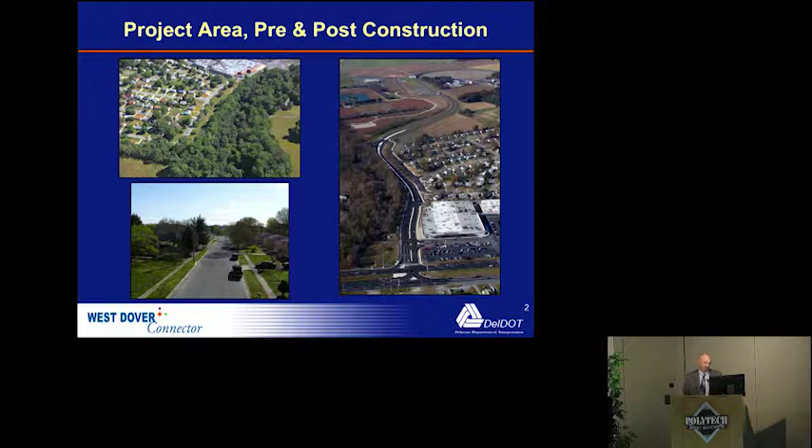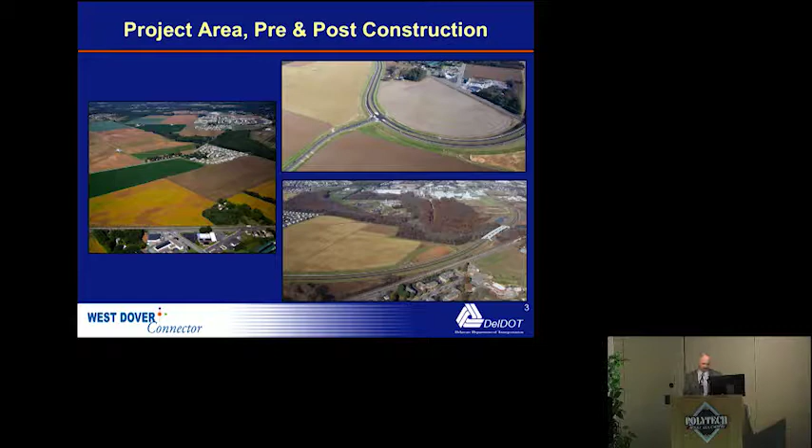Then you can see it traversing to the north across the Kesselring Farm. There's the new Boy Scouts facility as well as the new Kent County Park facility there. This is as the project traverses the Kesselring Farm on the opposite side of the railroad tracks and then proceeds over the Puncheon Run.

This is the bridge that spanned the wetland area. This was all part of our Army Corps negotiations. Rather than impacting the wetlands, we chose to span it.

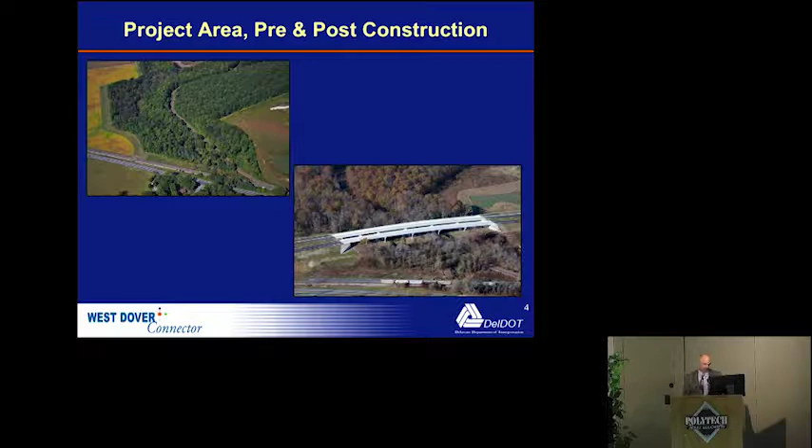And this is the northern terminus in the vicinity of Eden Hill. The first 1,000 feet of this was actually built by the developer, and then we tied into it.

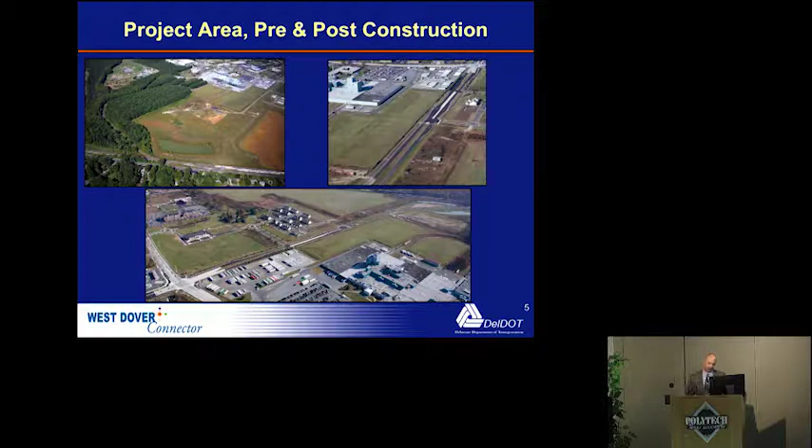In the early stages, we met with the resource agencies multiple times. This was the way we kicked off the project. We loaded them all up on a bus, took them out, and toured the project area. This was a huge success and very well received.

We then proceeded in putting together a working group. Let me note here that we had over 40 members on this working group. Lesson learned: don't have over 40 members. There is zero chance of getting consensus with that many members.

The bus trip worked so well with the resource agencies that we loaded the working group up and did the same thing. Again, this was very well received and time well spent.

As we went through the process, we brought the working group together 8 different times, and we also had 5 public workshops. All of the working group meetings were open to the public and very well attended. Strangely, we had free dinner at these events. I'm not sure if that brought them out or not, but the last one we did not have dinner, and there were very few people there.

But anyhow, at certain steps in the process, we'd have aerial displays and have the working group members draw up their ideas, and we ended up with 28 different alignments, which were then whittled down to 4 alignments that were taken into the alternatives analysis.

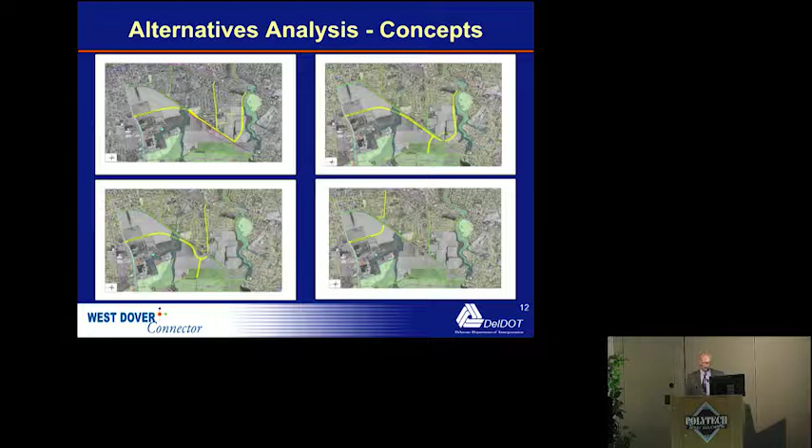These four, as well as the no build, of course. Like I said, we had 5 different public workshops.

Later in the process, we started bringing real estate to these meetings. We had 13 total acquisitions of residences, and as those people arrived at the working group or at the workshops, real estate would take those individuals aside and explain the entire process of how we do a total take, what kind of deals they get, and that was huge, because those were the people that were really impacted. They were also very pleased with the results of our impacts to them, I might add.

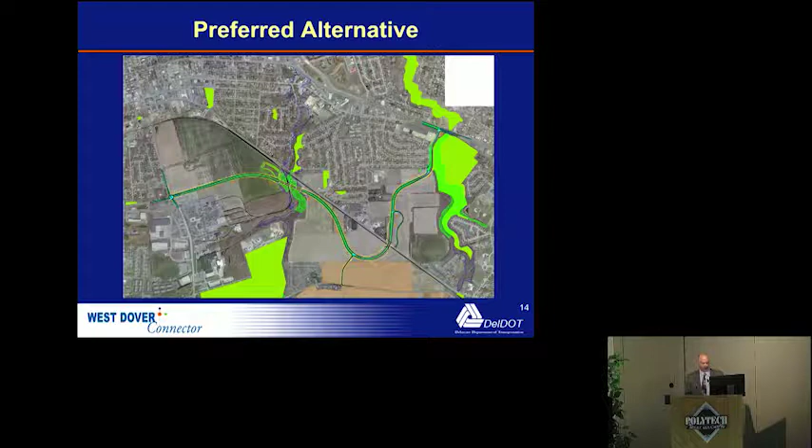This was the preferred alternative that was moved into final design. This alignment changed multiple times working with the impacted property owners. What was initially the preferred alternative looked slightly different than this.

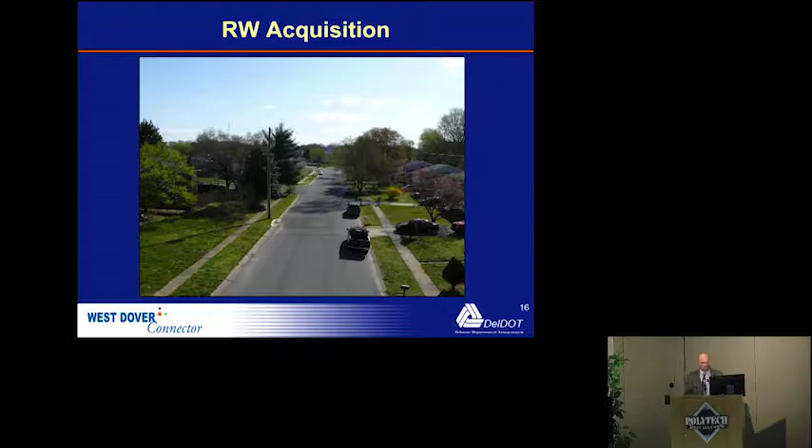All right, some lessons learned. This was Charles Polk before we started tearing down houses. The houses on the right are the ones that we acquired in total. They were all pretty tickled with the deal they got. The people on the opposite side of the road, however, were not so happy, and we're still dealing with them today.

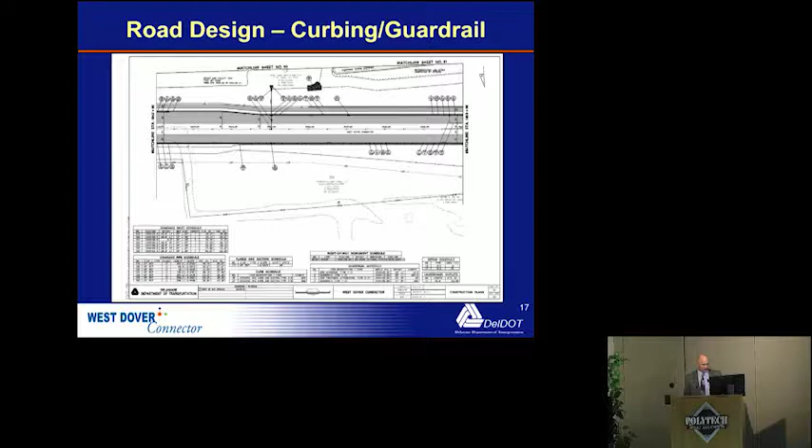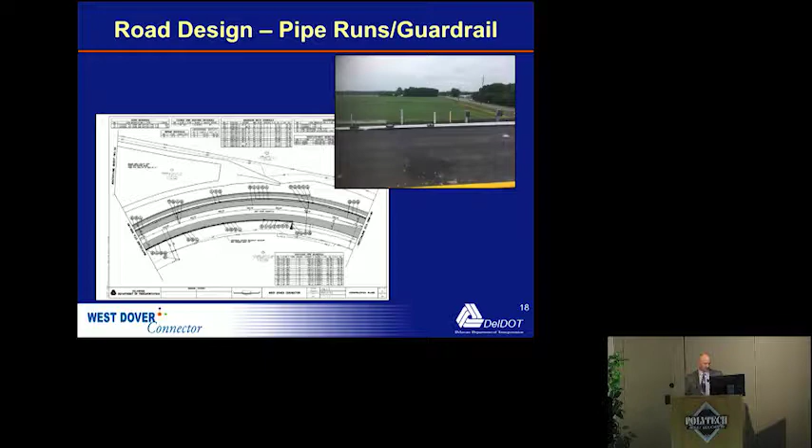Another instance with guardrail here. As you can see, the roadway is going through a pretty sharp curve. It's all closed drainage, and as we know, pipes don't follow curves. We had plenty of room to set these pipes deep because this was a high embankment area. Unfortunately, we did not, so we ended up having conflicts with the guardrail posts hitting the pipes. To fix this, we're actually coming back in, and every 4th post is going to get an additional post with an offset block to get them away from the pipes.

Bridge and roadway MOT. This, I'll just come right out and say, got missed. We had a consultant designer on the roadway. We had in-house designers doing the structures. Nobody looked at MOT for this structure, so I'm sure Mark could probably comment on overruns, but that was missed.

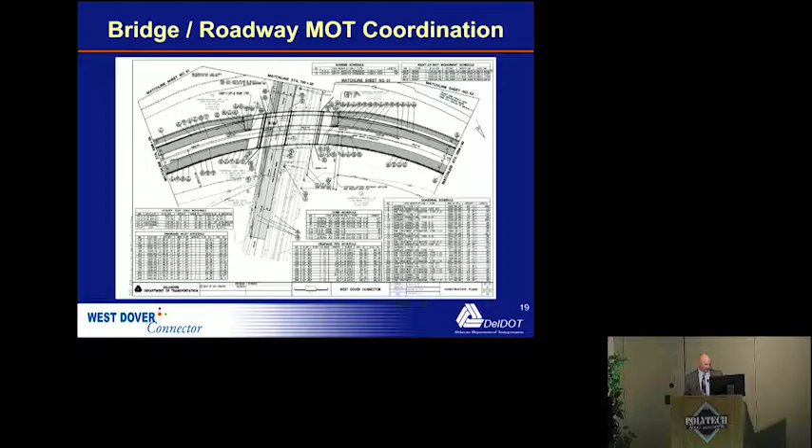Utility conflicts, as we all know, these tend to occur. The picture on the left was an existing signal pole and high voltage electric lines. When we came in to install the new signal pole, there were direct conflicts. So we had to come in, and the city of Dover actually put this line underground. But it's something that we should have caught earlier in the process.

The instance on the right, this wasn't really our fault at all. Delmarva Power came in to install electric back to the Boy Scouts facility, and instead of setting it far enough off the roadway that we wouldn't impact it later, they put it right on the edge, and so this had to be relocated as well.

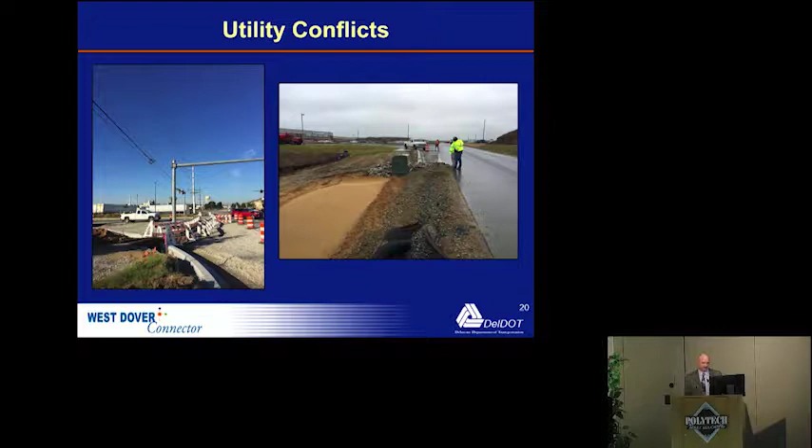Let's see, additional last minute signage. If you look at the sign on the top right, it says Clearview Meadow. This is a development over on Route 8. One of our area legislators drove by that sign and called us up. We were about 2 months from opening the roadway, and said, I want one of those signs out on the POW MIA Parkway. The powers that be told Mark and I to make it happen.

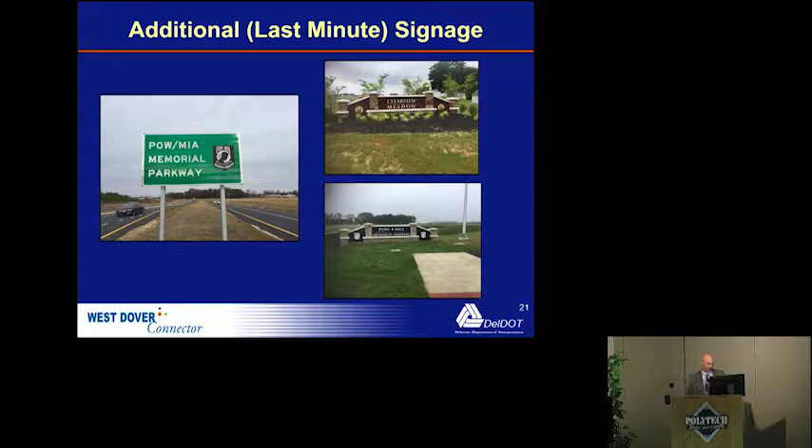Kudos to Mark and to Mumford & Miller for getting this monumental sign up. And the sign on the left was a very similar situation last minute, but working with the sign shop and the contractor, we were able to accomplish both of these. They were very well received.

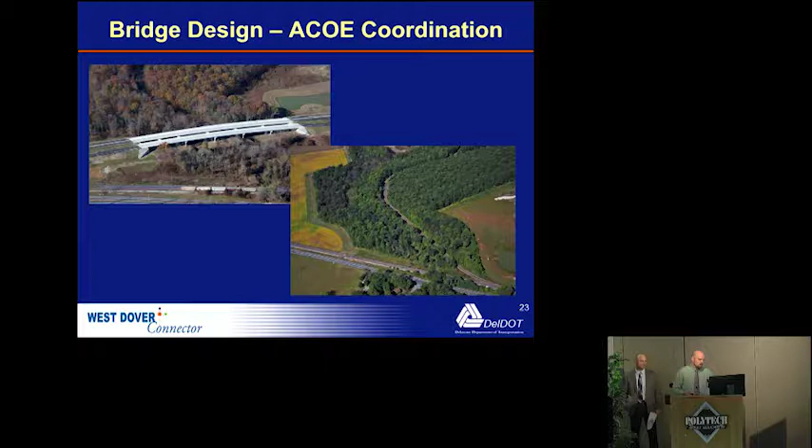That's when I entered the project and took it from there. We had some major issues during construction - lessons learned.

A railroad needs 23 feet of vertical clearance over their tracks. I think this probably came about because of the VE process - we tried to reduce the embankment heights, and in doing so, I think the clearance over the railroad was reduced to almost exactly 23 feet.

When we got into construction, there just wasn't enough tolerance there, and it's kind of a big deal when you build a bridge and you can't build it high enough. So that was a lesson learned - always give yourself enough tolerance in the field, whether it's survey or construction tolerances. You should always give yourself some wiggle room. So the fix was simple, but it shouldn't have happened.

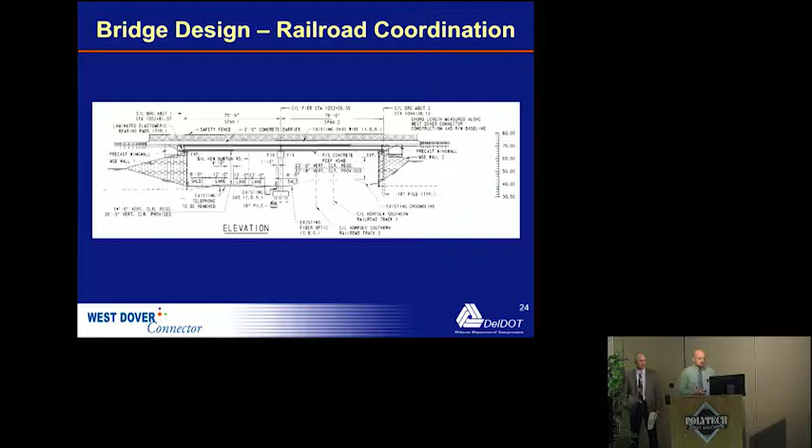We also had some utility conflicts along New Burton Road by the tracks because there were high aerials that restricted the crane from driving the piles. So we had to go back to our design and find a solution.

It ended up being that we could drive all three lines of piles, but one of the pile lines was supposed to be battered. We ended up driving them straight, and we checked the design to make sure that was acceptable.

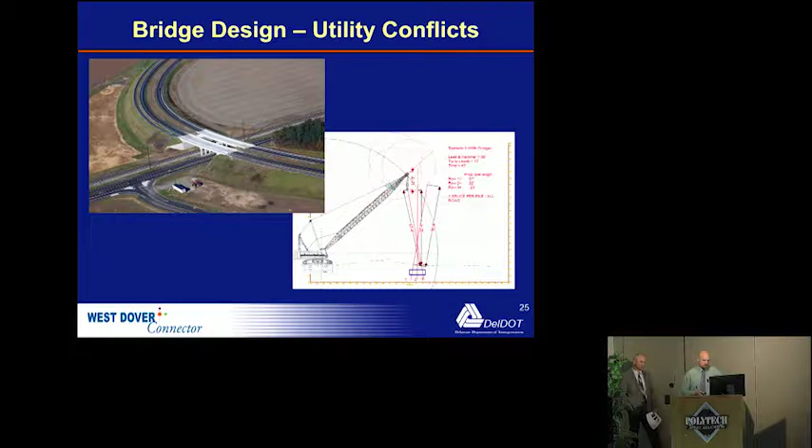In the picture of the crane there, I sent the contractor a cross-section, and he threw his crane in there to show it. The contractor was very good to work with through this - they were always double-checking everything before they did it.

The reason I'm talking about this is with both of these projects, the original designers of these bridges either moved up or are no longer with us. So we always have to work around those issues - there were a lot of lessons learned in how to deal with that on this project.

One of the main things for me was if a problem comes up in construction and the question comes to me and I wasn't the designer, I have no idea what's going on. I would rather have made a mistake myself and know how to fix it - it's easier to come up with a solution.

Also, during this time we were writing our new bridge design manual, and a lot of the details from West Dover were taken for that manual, looked at, and revised based on what we learned. Going forward, we have a lot more standardization in our processes and details that will help with this issue. So, Mark?

I started with the groundbreaking. This is the Secretary's first groundbreaking experience. You see your pink shovel still brand new in this photo.

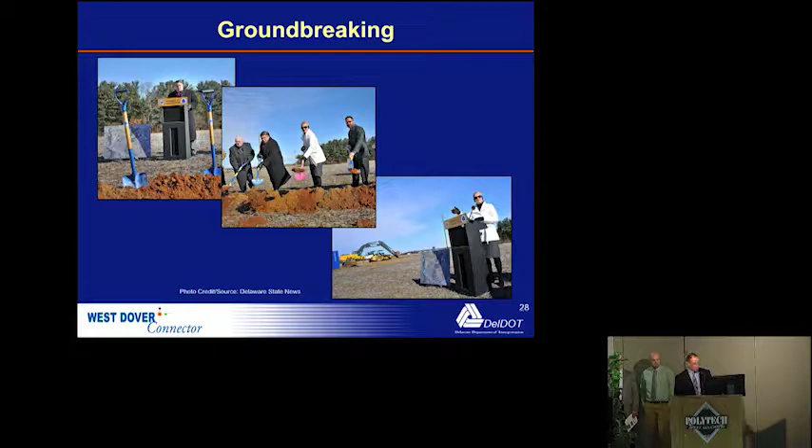This job featured a wetland access road. This is something I've never gone through before. I was a little concerned this could have ended very badly.

We worked with Carol Sullivan and Ken Dunn to come up with a plan that would work. The theory is to construct a wetland access road through the wetlands, and the little fingers coming off to the left here of this plan are where the bridge piers go. There's a proposed temporary wooden stream crossing for Pigeon Run.

The wetland access road would be constructed out of geotextile laid on the existing ground with R4 over top, choked in with number 3 stone. Good theory. I was a little concerned it wouldn't really pan out this well. By putting this road in this way, we wouldn't have any ground disturbance. The equipment can move in and out without disturbing any of the ground.

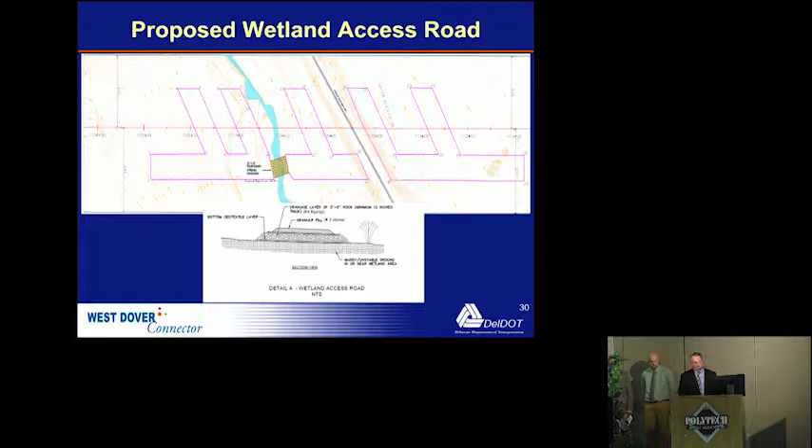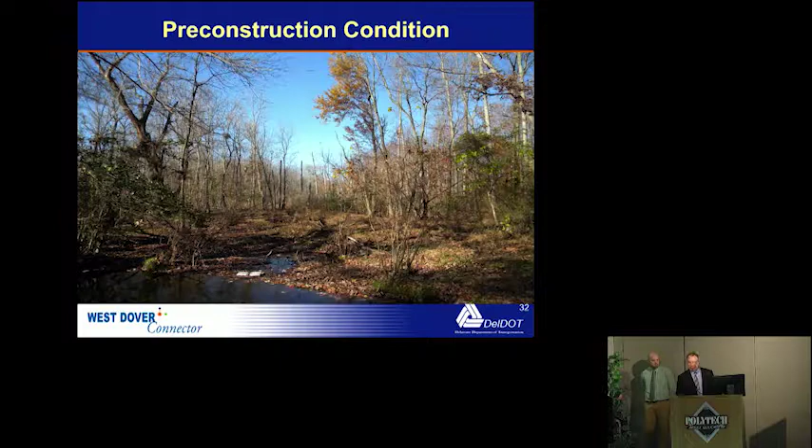Once we got started with clearing and grubbing, the contractor would lay out wooden planks for the equipment to run on, walk out, remove trees, and haul the trees back out. Again, by running on the platforms, you're not disturbing the ground.

Once you're done clearing and grubbing, they were able to go in and start installing silt fence. Now the silt fence, we didn't install it as your normal trench-in method. They would leave the flaps out and then lay compost logs on top—again, not disturbing the ground.

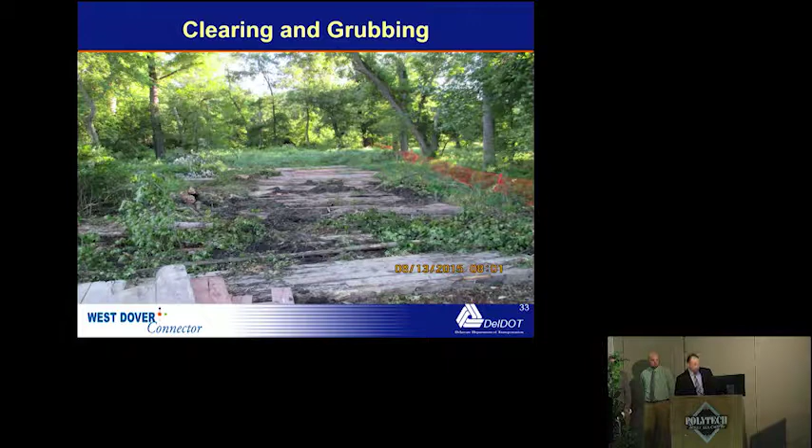Once they had all the silt fence in, the contractor could go to work. This is a shot of what it looked like during construction, with the wetland access road on the left side of your screen, with the little fingers coming off to where all the piers were.

This actually worked very well. We're very pleased with how this went down. There were a few incidents with some rainstorms that maybe toppled over some of the silt fence, but for the most part, this was a huge success for us.

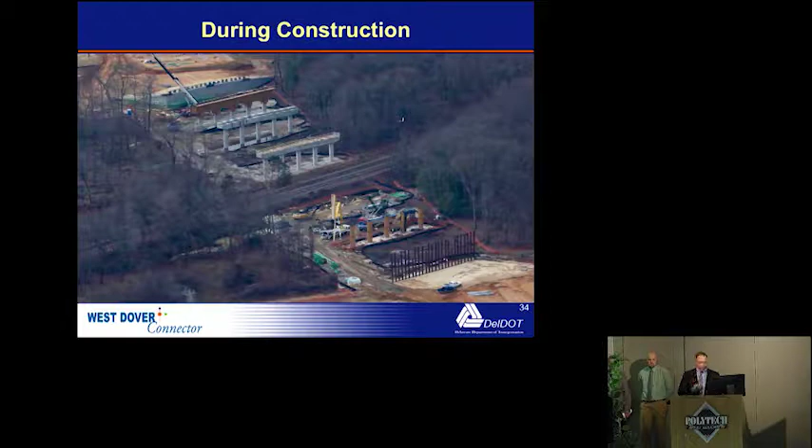One thing I missed on the previous slide—the contractor, before he started, had to as-built the existing wetlands, because when he's done, he had to go in and put all the material back and regrade everything to within a tenth. This grid was gridded out like a 10-foot by 10-foot grid, so they were able to put everything back within a tenth.

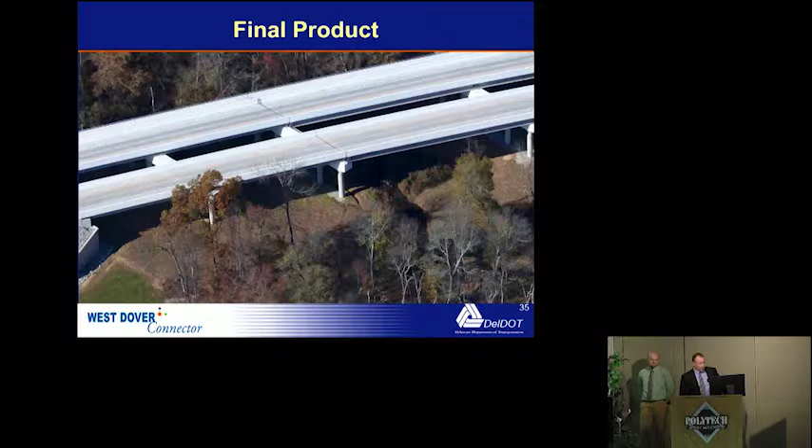Next thing I'm going to talk about is precast beam delivery. Normally this isn't a big deal—it's really a non-event. For some whatever reason, on this project, it was an event.

The precast beams here are about 130 feet long, some of the longest ones. The beams are cast in Pennsylvania. We have a police escort come out of Pennsylvania, come down to Delaware, pick up a police escort in Delaware, and bring it all the way down to the project.

This project, these beams had to cross the Roth Bridge. The Army Corps of Engineers said if that beam comes across our bridge, you have to close it completely, and only that beam can be on the bridge—no traveling public. I'm not sure who designed that one, Craig, but you might want to look at it and maybe beef it up a little bit.

Fortunately, maintenance was able to do some rolling roadblocks to help get the beam across. For every single beam that had to come across, you had to do a rolling roadblock. One of the beams even took a wrong exit coming in from Pennsylvania.

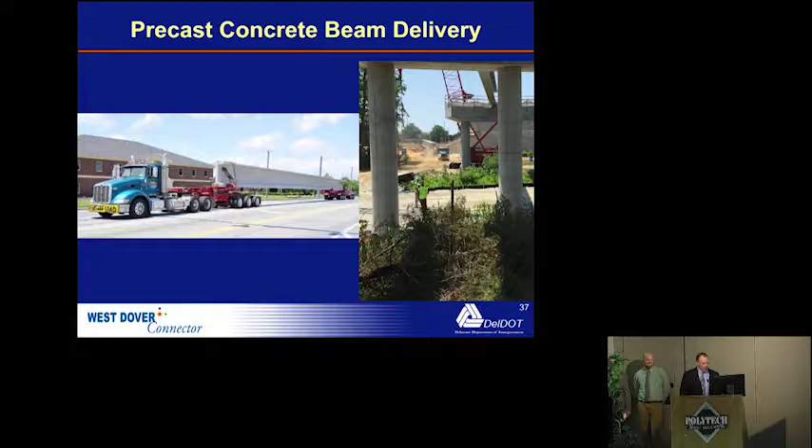Fortunately, the vehicle was able to stop prior to going under the beam, or this would have ended very badly.

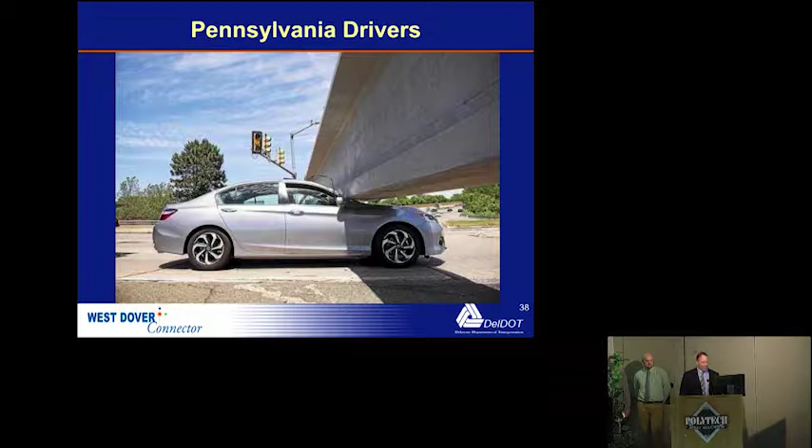Pennsylvania drivers, this isn't Delaware.

The last piece I want to talk about that was a huge success for us was the reconstruction of West North Street. The original design intent for this project was to just patch West North Street and do some crack sealing. When our inspectors went out and did an estimate on all the patches that would have to be done, they came up with around $1 million worth of patching. We were also going to do an ultra-thin overlay, which would have cost $300,000. In all, to just put a Band-Aid on West North Street, it would have cost about $1.3 million.

So we started thinking about what if we just reconstructed the entire thing while we're doing West Dover. Ryan O'Donoghue with FHWA said, sounds like a great idea, do an estimate, let me know what you come up with. Because there's Kraft, Procter & Gamble, and NRG along West North Street, we thought, why don't we just precast panels, this new innovation, the Secretary likes innovation, let's just precast panel the whole thing.

So preliminary estimates came back for precast panels at $13 million. Ryan said, there's no way I'm giving you $13 million. He said, get it under 6, then we could talk. I said, okay. So we worked with AECOM, who's the designer on this, and with John Gaines to come up with some sort of phasing plan to maybe do some of this West North Street in sections.

Close West North Street in sections, work around the businesses, figure out what would work for them. Really, there was no good closure time for them because Procter & Gamble and Kraft run tractor trailers 24/7. You can't close it at night, and you need cure time for the concrete. By staging closures on West North Street in sections, we could minimize the impacts to the businesses. We were very transparent with what we needed to have done, and they worked with us.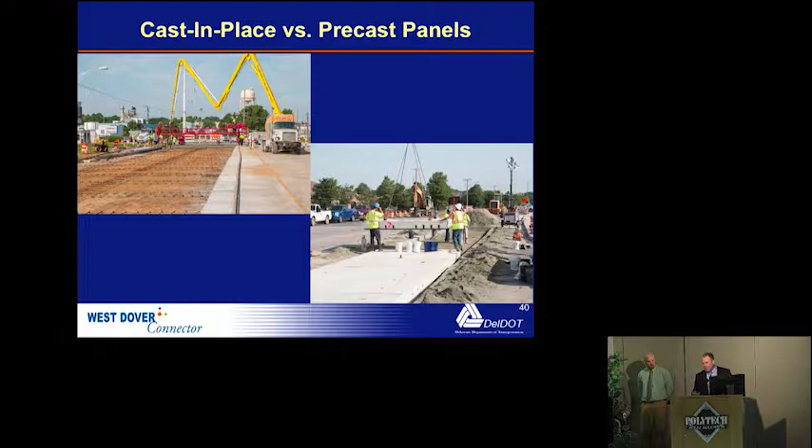Fortunately, we were able to do a lot of cast in place out on West North Street to minimize the location where we're going to run precast. To give you an idea of cost, cast in place for removal and replacement, MOT cost and everything was $160 a square yard. To do precast panels, we're talking $399 a square yard. Big price difference. So we were able to shrink down to just do precast panels in the intersection of West North Street and Saulsbury Road. Here's a shop drawing of the precast panels that are in the intersection.

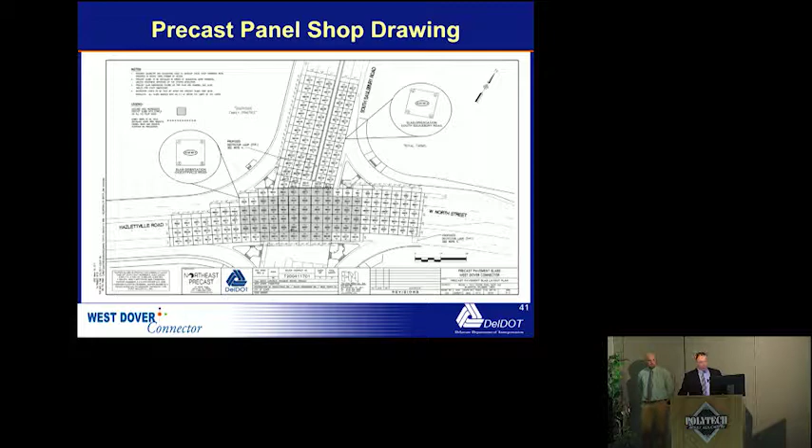Every one of these panels has a number identifier, and every one of these panels is cast differently. Most of them are not the same. So when a panel comes out to the job to be installed, it'll have a stamp on the side of the panel, so you know what panel you're dealing with and where it needs to go in relation to the shop drawings. Every one of those panels was looked at prior to delivery to make sure it was all going to have a good fit.

Fortunately, with West North Street, we did cores early on to determine the subgrade, and we had a very good select borrow base. It wasn't wet, it was in good condition, and we didn't have to do any subgrade mitigation.

Once the contractor, in order to do the precast panels, would come out a week prior, saw cut the area of the precast panels longitudinally and then transversely. That way, when they come in to actually put in the panels, you just demo your section of concrete, grade your subgrade, and they used stone dust material as a sand bed.

Once you get the stone dust on grade, it takes several iterations. That's probably what took the longest, was placing the stone dust and getting it on grade. They would place stone dust, fine grade it, compact it, place stone dust, fine grade it, compact it, so you had a nice level surface for the precast panel to rest on. This is a photo of the stone dust on grade and lifting the panel into place.

We left about a half inch on either side of the panel for the existing concrete, and for the panel that may have been placed previously, for the panel to sit right in. We had established grades on every corner of the panels so we know where we were.

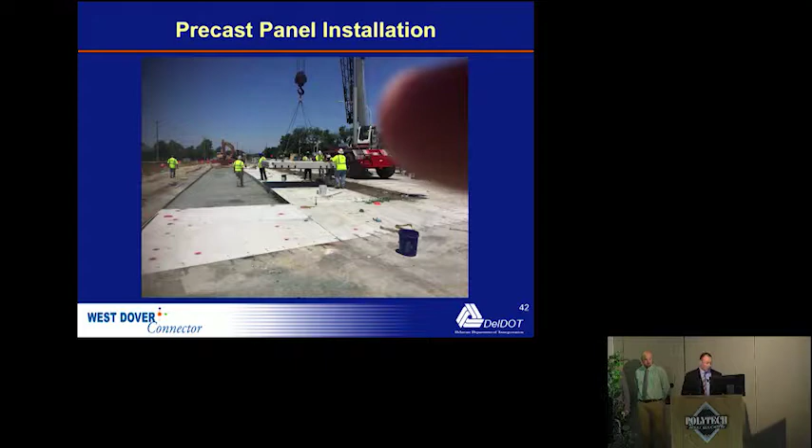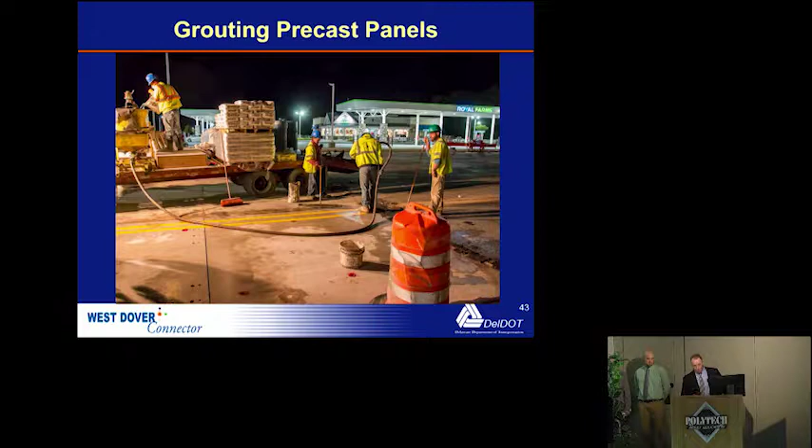After your panels are set, there's grout holes that the contractor will pump grout in to lock in the panels around the dowel bars themselves, and they would also pump grout in as a setting bed underneath the panels. Fort Miller provided the precast panels for us, and they were a huge benefit to the success of West North Street. Got a little plug in for Royal Farms because they didn't complain one time the entire time we were out at this intersection.

This is the final product. As you can see in the intersection, that's where the precast panels are, and on the right side of the photo itself is the cast in place concrete. I thought this went fantastic. I thought it looks excellent, and it rides phenomenal. So kudos to Mumford & Miller for providing the crews to do this project.

Thank you to FHWA for providing the funding. Finance, Laney Thornton helped us secure the funding. From concept through securing the funding, through design, reconstruction, it took us 1.5 years, and that's moving. And so thank you to everyone involved with this, design, public relations, and my inspection staff, really. I would not have even thought about attempting this if I didn't have the staff out there that we had. So thank you.

We're not done. We still got time here. Got 3 minutes.

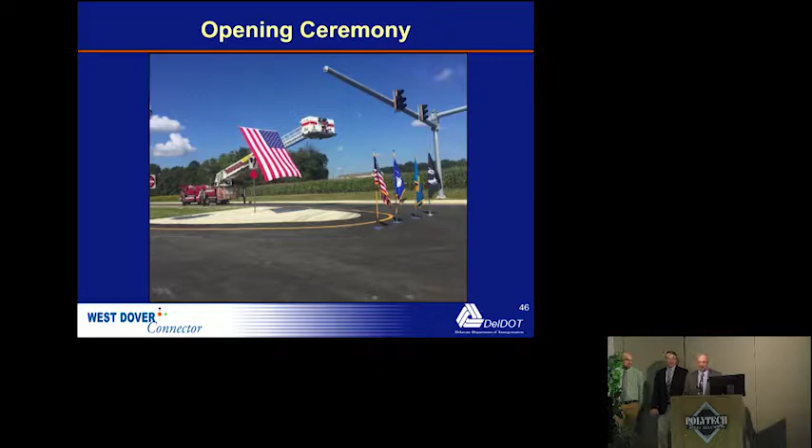So we also had an opening ceremony and a ribbon cutting and a groundbreaking. I believe at the groundbreaking it was about 15 degrees and the wind was blowing about 40 knots. At the ribbon cutting it was probably close to 100 degrees, all out there on hot mix. It was very well attended.

The governor was there to speak, and this gentleman on the right is Brigadier General John Reynolds. He was a POW for 7 years in Vietnam, so it was an honor to have him out there to give a speech, and there was a huge attendance of veterans. There's a large group of Vietnam veterans from up around Smyrna, and overall it was very, very well attended. There were a lot of speakers.

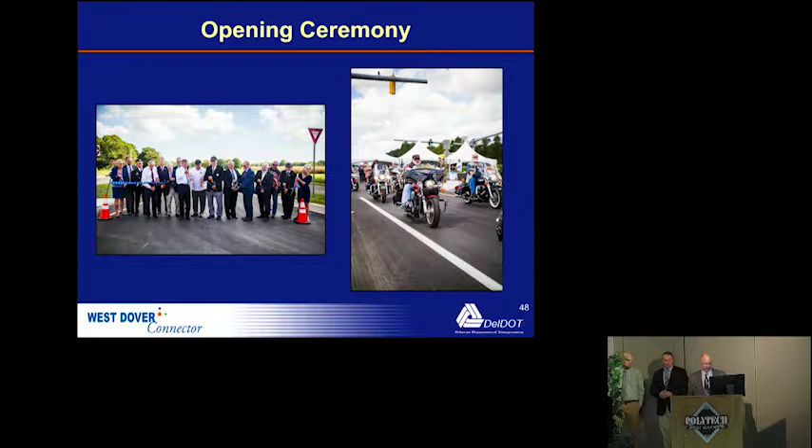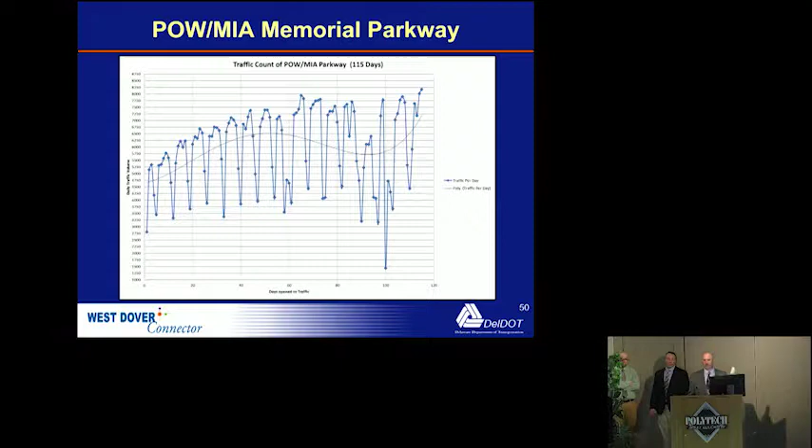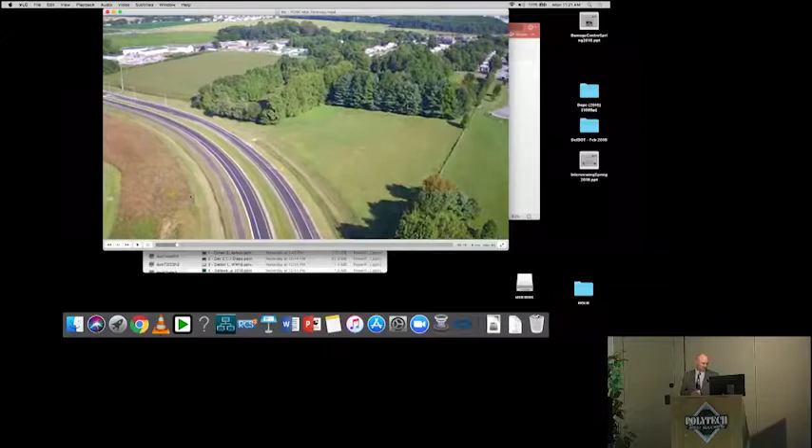And this is a drone flight, if it's going to work. Is there any way to select that? There we go. Oh, well, I guess it's not going to work. I put it in the folder. I know. Oh, well, I guess that's it then. Do we have any questions? Yeah, there we go. I'll just leave that plain.

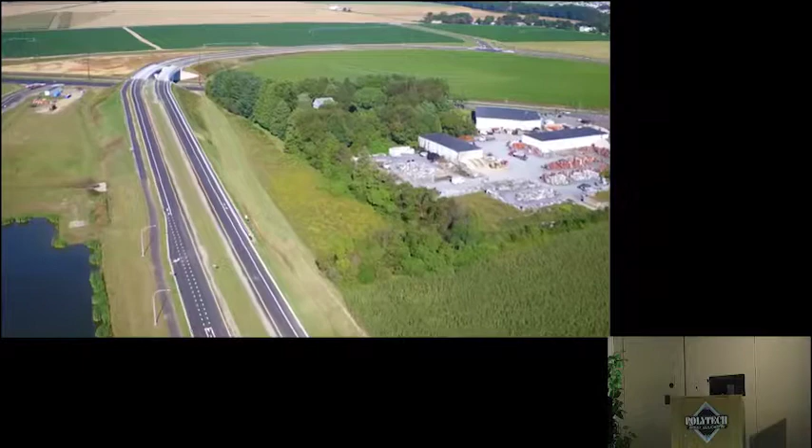Hey, John, I got a question for you. You said the folks in Rodney Village are still unhappy. What are they unhappy about? They know what the deals were that the people across the street got, and they're not gonna ever go sell their house for the same type of deal.

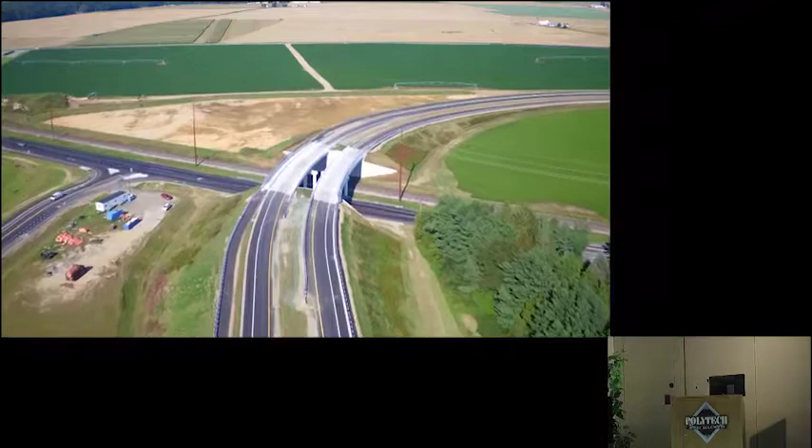Well, the landscape buffer between Rodney Village and West Dover Connector, POW/MIA Parkway, it looks awesome. Yeah, that all came out really improved, that buffer strip there between Rodney Village and the highway. Overall, I think it really came out great.